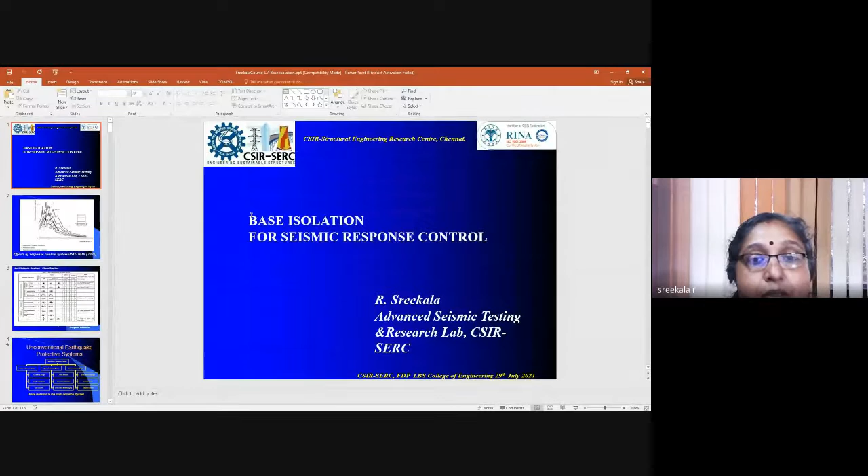After I joined, I was quite fortunate to be involved in some of the works carried out, regarding base isolator testing and the seismic testing of structures. Whatever I'm presenting today is basically some of the works which have been carried out in SERC, and some of the model provisions which are there in this field of base isolation, which is coming up nowadays. The IS 1893 Codal Provisions Part 6 is coming up, and it is under publication. With this introduction, I would like to start the presentation.

I hope you all enjoyed the session in the previous days. Our earlier head of the department, Dr. Satish Kumar, elaborately discussed the topic of seismic response control, and various mathematical principles behind that have already been discussed with you. With that introduction, I hope the seismic response control systems are quite familiar to you.

There are many types of devices or external fittings which can be fitted into a structure, or even for newly constructed structures, these technologies or strategies can be adopted. All these base control systems come under the category of passive control systems. In vibration control there are passive, semi-active, and active control systems, out of which we are right now discussing the passive control systems. Base isolators come under the category of this passive control.

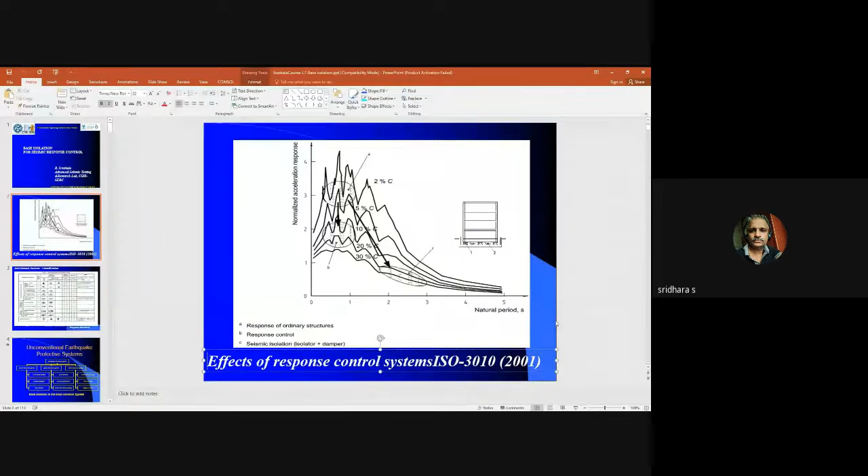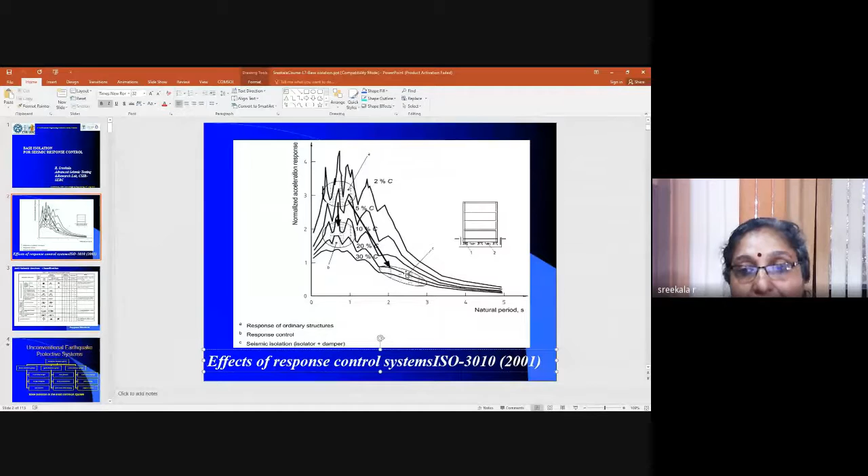I have tried, okay. So this is the response control system description given in the ISO standard 3010. If you see the response of ordinary structures, represented in category A here, and when you adopt seismic isolation, it comes under category C, where isolators and dampers are introduced to reduce the seismic response quantities, in the sense acceleration, drift, or other engineering parameters of interest.

So with seismic isolation, there are many other seismic devices which can be fitted into the structure to reduce seismic parameters like accelerations, displacements, and other parameters. You are all familiar with these kinds of devices, which can come under different categories like passive or semi-active control systems.

The European standards have classified these anti-seismic devices. The representation comes under displacement dependent devices or velocity dependent devices, and there are elastomeric isolators.

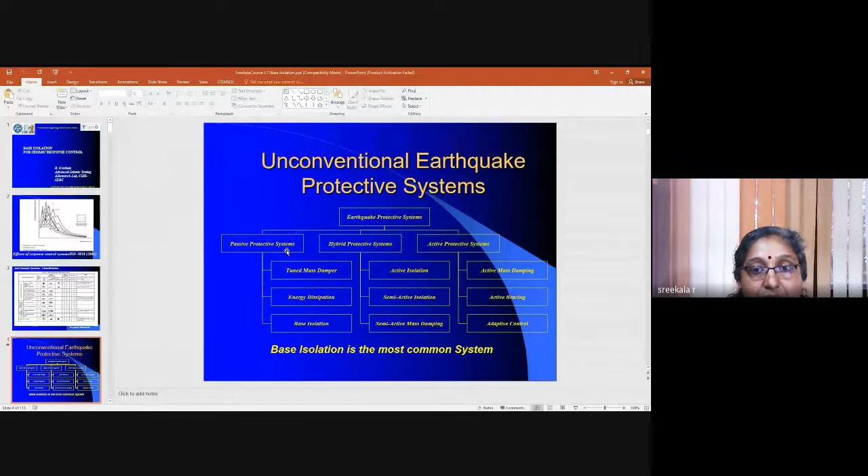So what it actually does, when it acts like a passive protection system, when you have the base isolators within the building, it tries to absorb the energy so that it decouples the superstructure from the substructure. This decoupling process increases the time period of the structure, so that if you see the response spectrum, the force attracted, which is a resultant of that elongation of the time period, gets reduced. That is the actual mechanism which happens in base isolators.

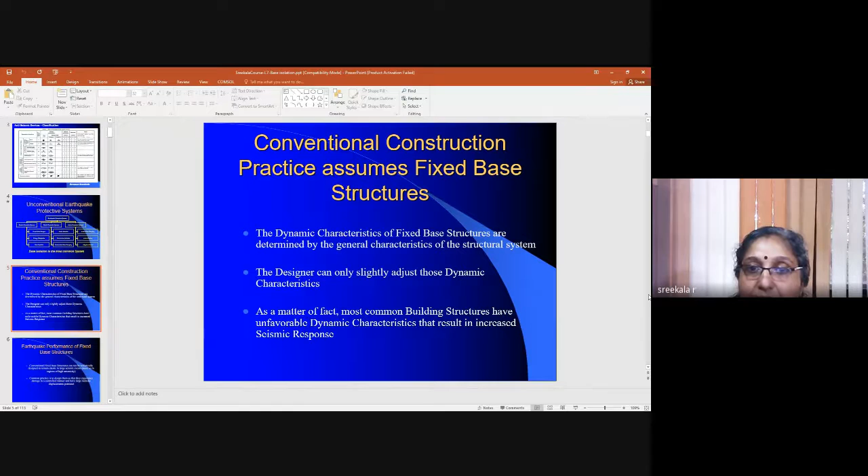So the conventional construction practice assumes fixed base structures. The dynamic characteristics of fixed base structures are determined by the general characteristics of the structural system. So what difference the isolator makes is that technically it changes the time period of the structure, so that the base shear which the structure attracts due to these earthquake forces gets reduced.

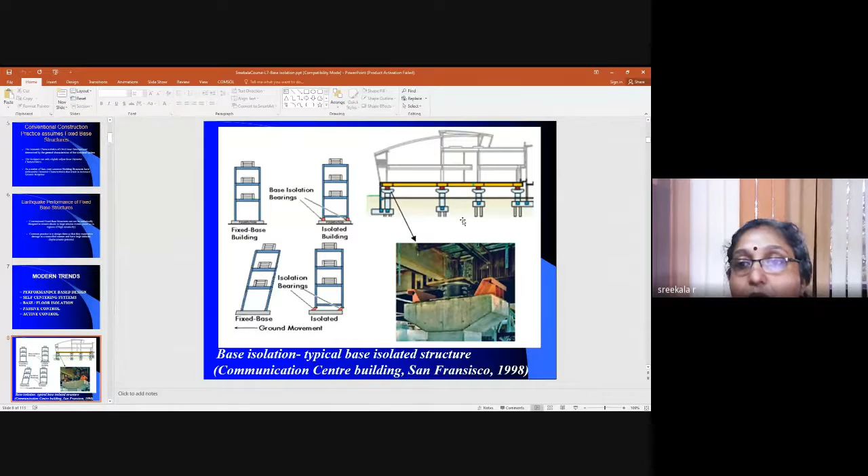This is a communication center building in San Francisco, wherein these kinds of isolators were implemented in 1998.

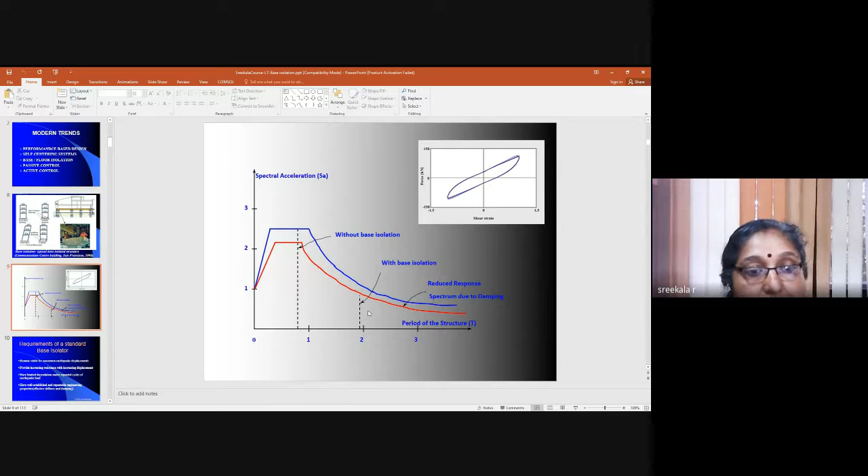So many times the practice of base isolation with higher damping will be mostly beneficial, and a judicious judgment of the base isolation practices has to be done even before going in for the actual implementation.

Large parts of India are prone to moderate or severe earthquake shaking, and there are many critical infrastructures built in these regions, so earthquake resistant design is very much essential. But the choice of base isolation need not be quite helpful in certain parts. If you classify structures in terms of time period or other characteristics, a judicious selection of these practices has to be made before going in for actual implementation.

This is as per the FEMA guidelines, the Federal Emergency Management Agency. Our codal provisions, earlier codal provisions, were taken from the NEHRP and FEMA guidelines.

So if you take the actual seismic response behavior of a structure when you provide this base isolator, the characteristics which need to be clear before we adopt this strategy are the maximum and total maximum displacement of the isolator, which includes not only static displacement but also dynamic displacements of interest, and the hysteretic energy dissipation characteristics of the device.

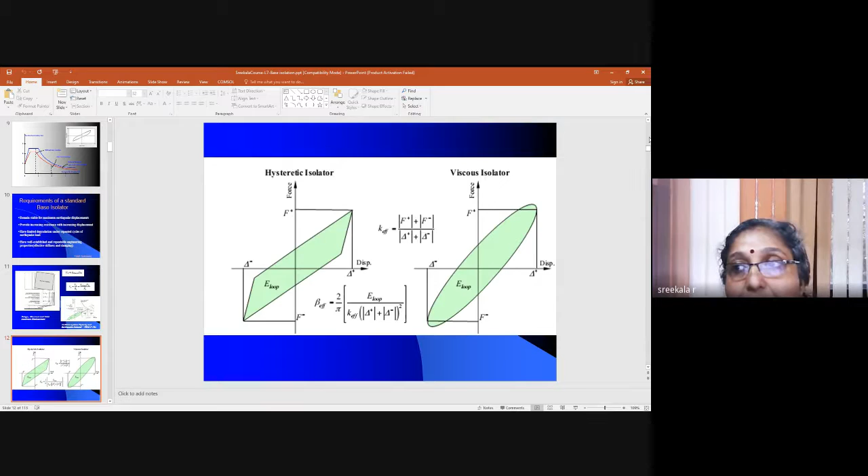When you go in for earthquake resistant design, there are three parameters we are interested in: ductility characteristics, over strength, and energy dissipation characteristics of the system. The energy dissipation characteristics of the isolator are important, and the maximum displacement this isolator suffers during a particular level of earthquake is also important.

Where and how we can provide these base isolators is of particular interest for us. They can be provided at the base of a building, or at intermediate levels. There are floor isolation techniques in which these isolators are provided at intermediate levels of the building.

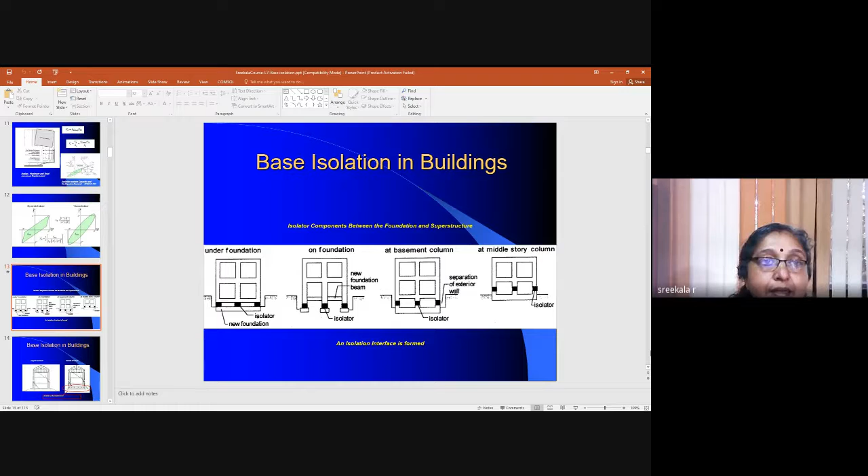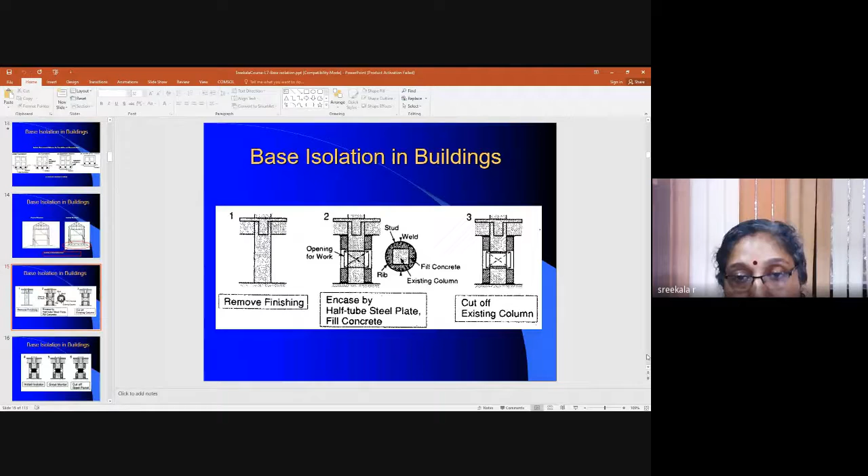So basically the whole presentation is made in such a way that after this brief introduction of isolation in buildings, where the isolators are placed at the foundation level and how they are placed, the construction practices are briefly described here, how they do it even for existing buildings, not only for newly designed buildings, but it can also be practiced for existing buildings.

The same strategy can be practiced even at intermediate levels, or even roof isolation systems, which are actually implemented in many places.

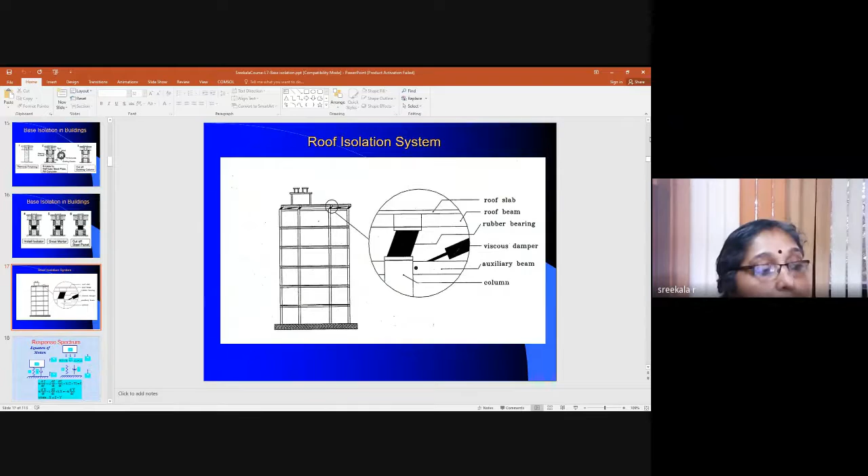So the basic presentation is divided into 4 or 5 categories, after which we have seen what are the basic requirements of a base isolator, and some of the basic concepts in which this isolation system works.

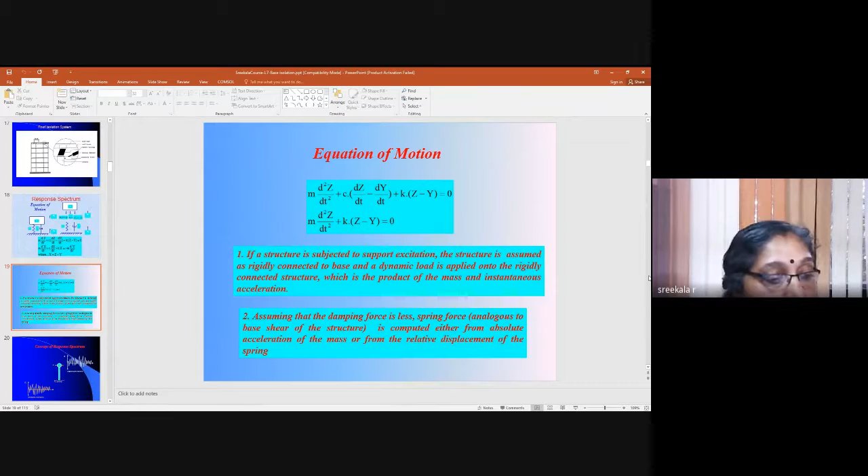I think you are all familiar with basic concepts like response spectrum, and how an idealized lumped mass system, when acted upon by inertial forces, the response will be calculated. An idealized system is represented through its stiffness, damping, and other characteristics, and how the modal damping or other characteristics of the building influence the response of the structure.

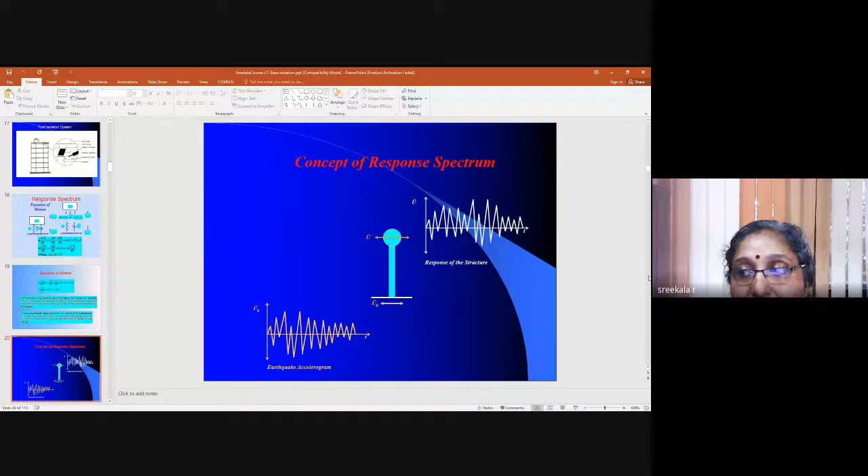Response spectrum is a representation of the seismic response of an idealized single degree of freedom system. But it is a smooth response spectrum that we use for an ensemble of earthquakes, since accelerograms of various earthquakes can be of different types - long duration or short duration events, near fault or subduction events, or normal earthquakes. So response spectrum provides the designers the seismic force which can be imparted on a structure for a particular level of intensity of earthquake.

The intensity, or the whole lot of structures, are classified in terms of the time period of the structure, and the y-axis represents SA by g, or the spectral acceleration. Depending on the time period of the structure, the classification of structures comes under that. So the representation of the natural time period of the structure is what determines how much seismic force will be imparted on a structure.

So from the designer's perspective, it will be easier for us to make use of the response spectrum and find out the seismic forces, and for those forces we can design the structure, so that earthquake resistant design of structures has been made.

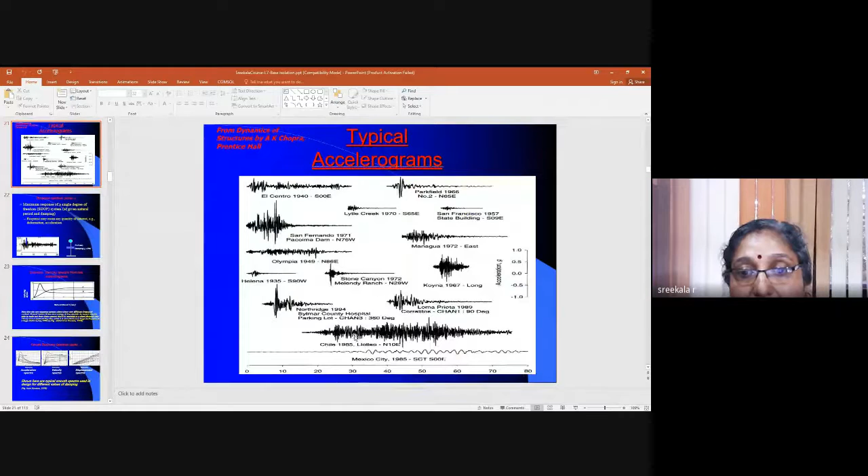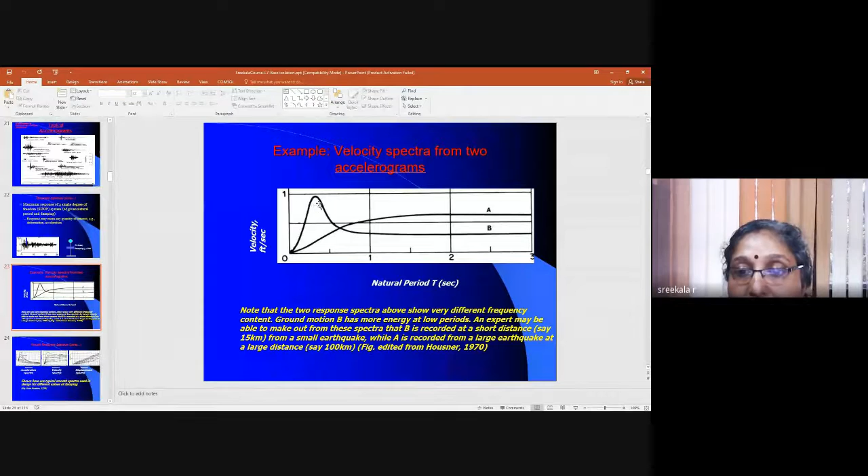Here A and B character - A is for a particular kind of earthquake, and this is for another kind wherein you can see a higher velocity response is observed. So these are two types of earthquake which can be represented in terms of energy characteristics, and the energy imparted to the structure will be different for these two types.

So every earthquake is unique in nature, but for the designer's point of view, in order to simplify the process of design of structures, we make use of this response spectrum.

But we all know there are other kinds of effects which come into picture, like the soil effect. When you see soft medium clay and sand - this is a typical example taken from the textbook - you can see there are variations in the spectral acceleration with respect to the time period. If you see the ratio between spectral acceleration and maximum ground acceleration, there are variations.

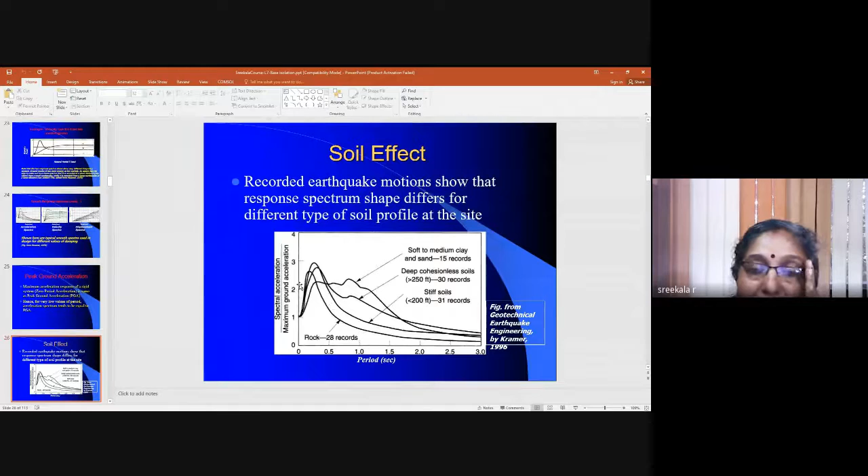So the concept of response spectrum is very much dependent on other factors. It is the one which tells you how much force, or the horizontal force, will be imparted due to a particular level of earthquake.

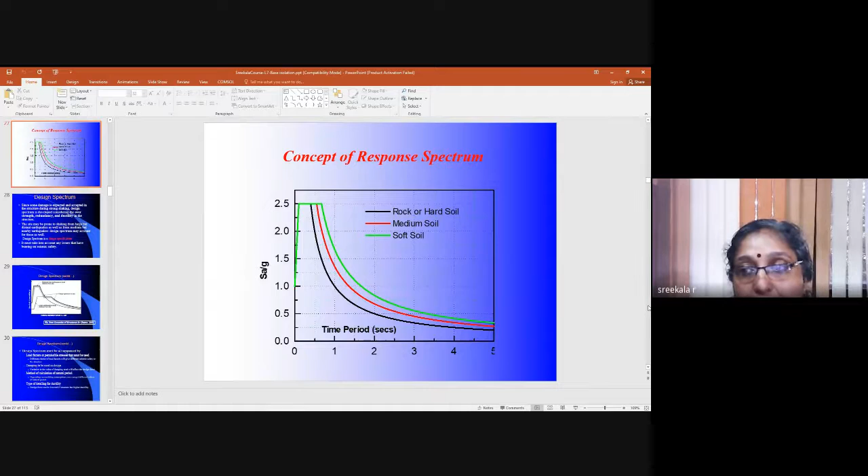And we all know there are different zonal classifications. The whole of India is classified from zone 2 to zone 5, and there are different acceleration levels or PGA levels associated with those zones.

I would like to skip these slides because you all will be much familiar with this kind of representation. But of course, we'll be knowing that there are differences.

There are differences between different kinds of earthquake accelerations, accelerograms, mainly due to the energy imparted to the structure. Here you can see this is a moderate size earthquake at small distance from the site, but a large earthquake at large distance from the site can be represented through this. So the area below this may represent the energy imparted to the structure.

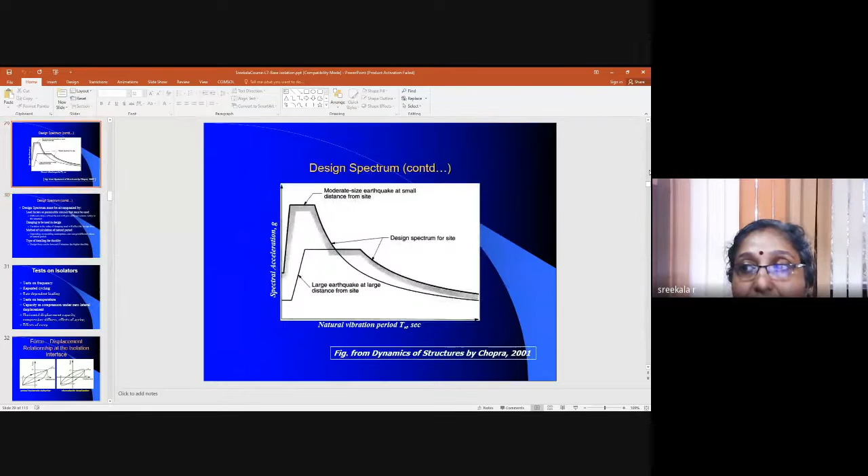But there are significant observations which can be learned from these kinds of response spectrum as well.

Today we'll concentrate on the seismic design of structures with isolators. As we talk about isolators, which are provided below the superstructure, they have to be tested for various dynamic characteristics. What are these characteristics? There should be tests on frequency, repeated cycling, rate dependent loading, temperature, maximum horizontal displacement, compression stiffness, and the effects of aging and creep. These are the main dynamic characteristics which need to be tested.

There are different standards which talk about this. There are international standards 22762, which have various parts. Parts 1 to 4 talk about different kinds of testing meant for isolators for various applications - for buildings, for bridges, and so many other things.

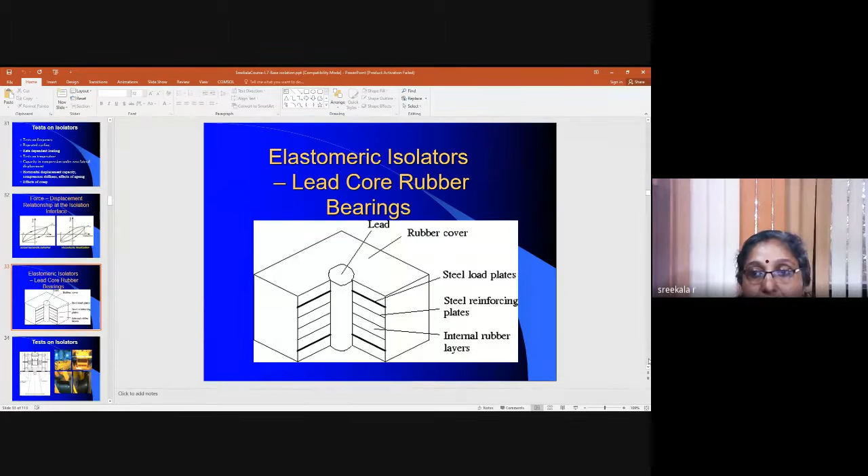This is a kind of test setup developed here earlier. Our earlier director Dr. N. Lakshmanan, our previous head of department Dr. K. Muthumani, Dr. Gopalakrishnan, and Satish Kumar were all involved in developing this testing setup within the laboratory. You can see the isolators here.

There are two isolators kept here. Normally, isolators placed between the superstructure and substructure are subjected to a constant vertical load, and either linear or non-linear varying seismic demands or lateral loading. So a test setup should provide this kind of loading. You can see the varying load given, with a pre-tension device setup so the axial load can be fixed for a particular loading case, or it can even be varied.

You can see the isolators subjected to lateral loading and constant or varying axial loading. This is a typical force displacement hysteretic curve obtained on the prototype laminated rubber bearing, designed and developed by SERC, made by people familiar with rubber processing and the chemical or heat treatment processes involved, by which steel plates are fully vulcanized with rubber layers.

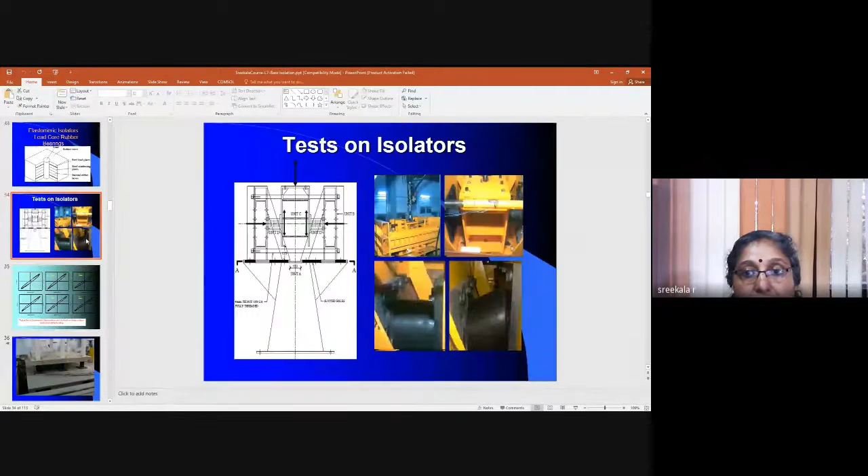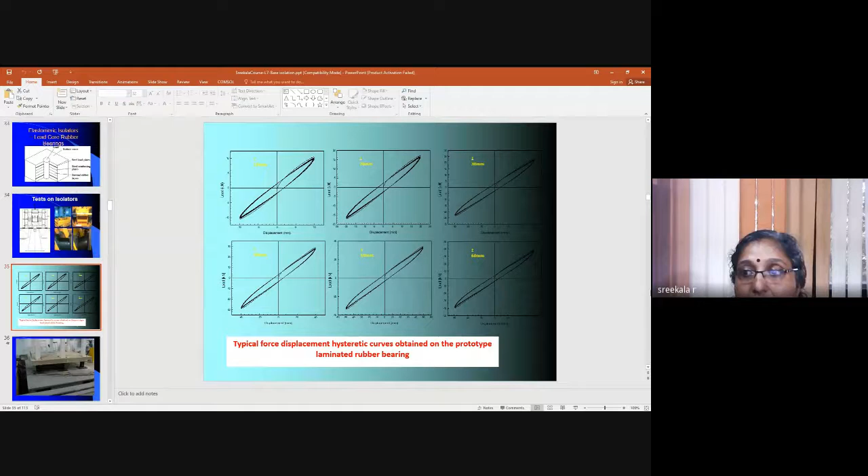After the test, you arrive at the force displacement characteristics of the isolator, shown here for varying types of loading. This is a kind of cyclic test, but it's quasi-static testing. There is shake table testing performed on these types of isolators. This product was developed at SERC, with component level testing as well as prototype testing carried out on structures.

The product consists of steel shims which prevent the rubber from bulging out and increase vertical stiffness. The lead core is introduced at the center, which yields at very small levels of lateral displacement, increasing the damping characteristics of the system. If you see the response spectrum pseudo-acceleration characteristics, with the introduction of period shift in the structure, the seismic response has improved - acceleration has been reduced and damping characteristics increased.

Seismic base isolation is an effective method for filtering out high frequency components in an earthquake. The characteristics of input ground motion are quantified by the response spectral acceleration, which normally diminishes at low frequencies or high time periods, typical of base isolated structures. Here you can see the behavior of the system plotted against displacement and time period - as damping increases, the seismic response also reduces.

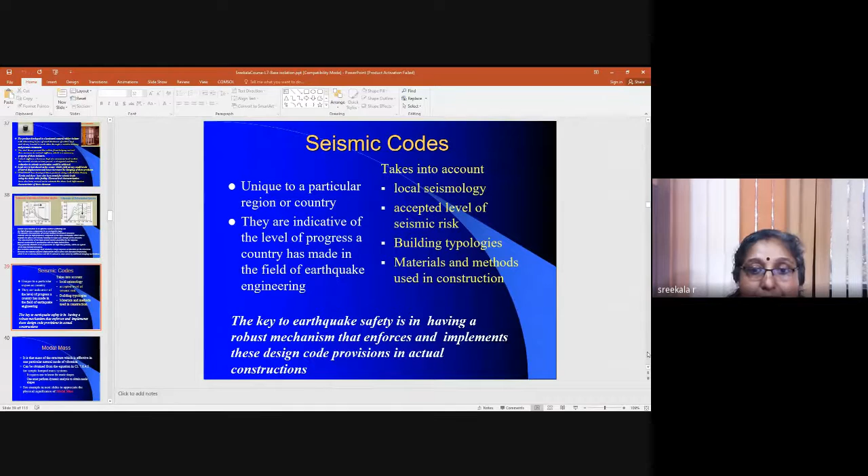So they are prescriptive in nature. Seismic codes help designers bring out safe construction practices. Earthquake safety lies in the proper usage of the code provisions, and there should be a robust mechanism which enforces and implements these design code provisions in actual construction.

So these are some slides which I would like to skip, but these are some terms which we should be familiar with - the modal mass, the mass of the structure which is effective in one particular natural mode of vibration.

When we take this response spectrum into consideration, it has been developed for an idealized single degree of freedom system. Many civil engineering structures mainly belong to the acceleration-sensitive or velocity-sensitive region of the spectrum.

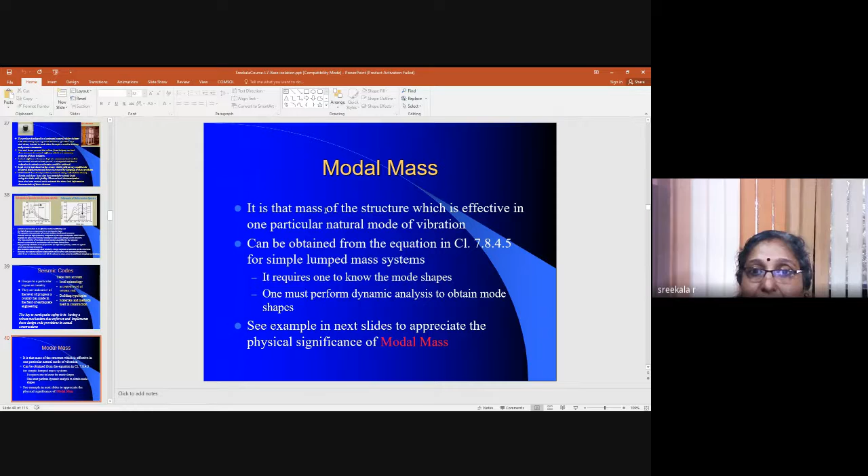We'll be much more interested, as civil engineering structures, in the natural frequency or time period associated with the initial few modes. But when we talk about tall buildings and other things, in the long period region of the spectrum, higher modes also will be of importance. So modal mass is something which is associated with the natural mode of vibration.

For example, these are some things taken from the course provided by IIT Kanpur, by Dr. Sudhir K. Jain, professor, who has given a wide explanation of different kinds of terms associated with that. If you take the example of modal mass, in this 3 degree of freedom system, 5% damping is assumed in all the modes.

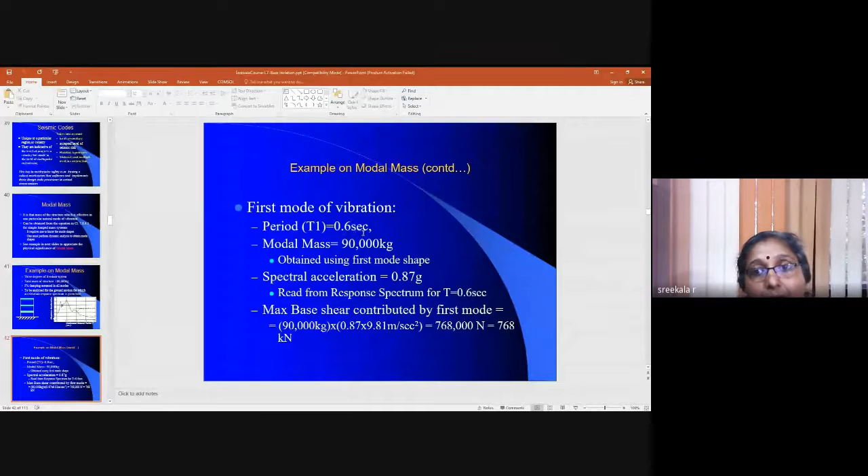So the base shear associated with that has been compared with the other modes. All these examples are there in the notes or other documents which have already been published by IIT Kanpur - you can have a look at that.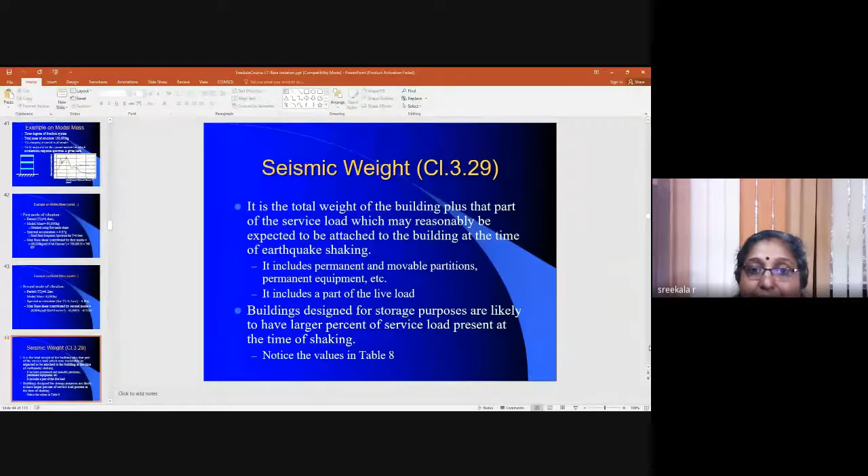And effective seismic weight is something which often comes up in the new codal provisions also - the seismic weight which we take into account due to the dead load, the service load, and the live load. In the recent codal provisions, instead of 25% live load, we are supposed to consider 50% live load.

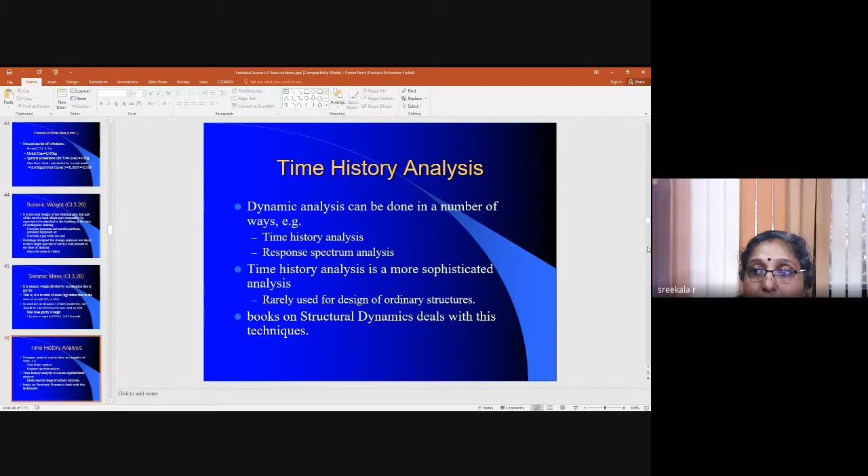When you talk about the analysis, there are different kinds of analysis. The earlier codal provisions were using equivalent lateral force procedures, depending on whether the structures are regular or irregular. Equivalent lateral force procedures also have certain limitations, so probably we may have to go into other kinds of analysis - response spectrum analysis or time history analysis.

Time history analysis, of course, is computationally intensive. It requires a lot of other inputs as well. It is not quite as easy as the equivalent lateral force procedure, but where and when we should use these kinds of analysis is very much clear in the latest codal provisions, IS 1893-2016. Probably you can have a look at that.

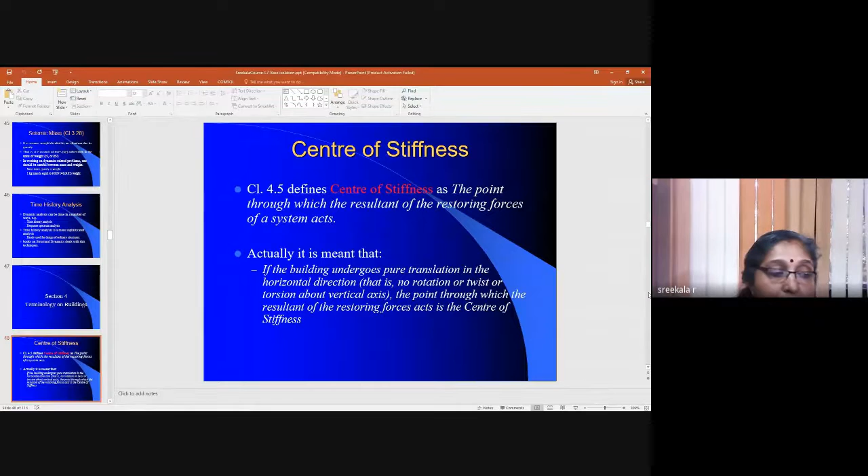There are terms like center of rigidity and center of stiffness, static eccentricity and dynamic eccentricity, and accidental eccentricity, for which allocation has also been provided. There are dual systems which we need to consider.

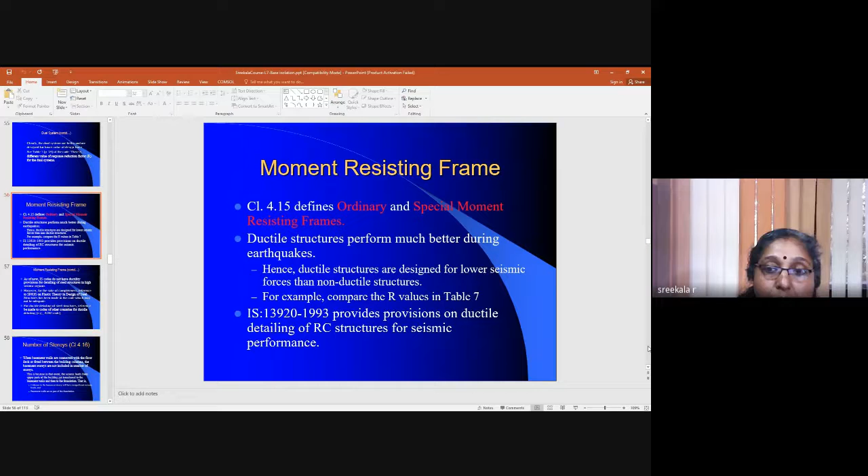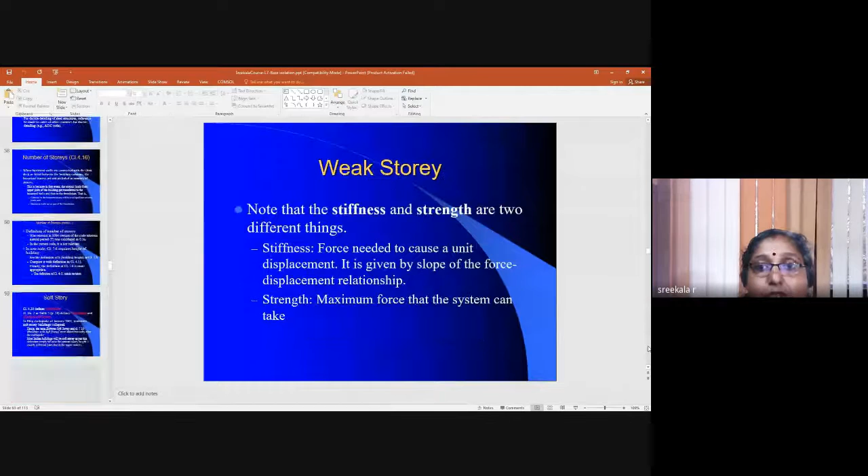Then there are moment resisting frames of different categories. IS 13920 provisions are getting upgraded for RC, and a new steel building code is also coming up, maybe published in a few months. Terms like soft story and weak story should be familiar before we move to actual practices.

Then there are story drift limitations. Basically, all these are meant for having a seismically safe construction practice.

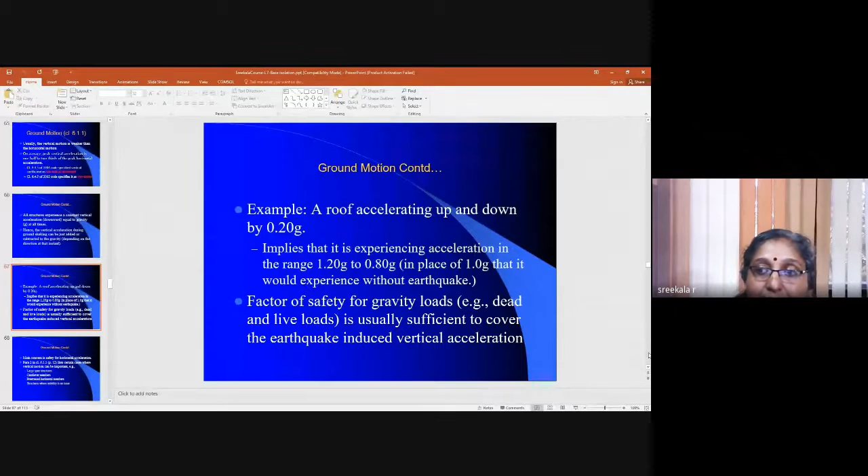When we talk about design of isolators, it is not only the horizontal component but the vertical component that also has importance. Normally vertical component is not considered in many engineering practices, but since the structure itself has weight, around 1g acceleration level is already accounted for due to the weight of the structure.

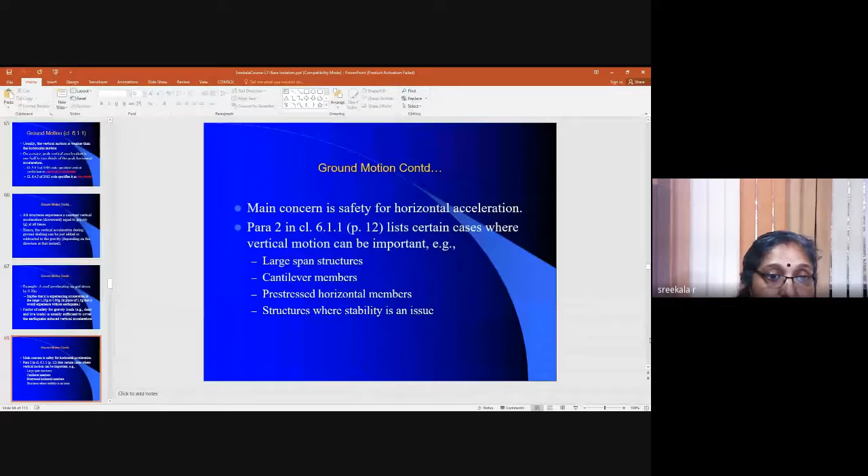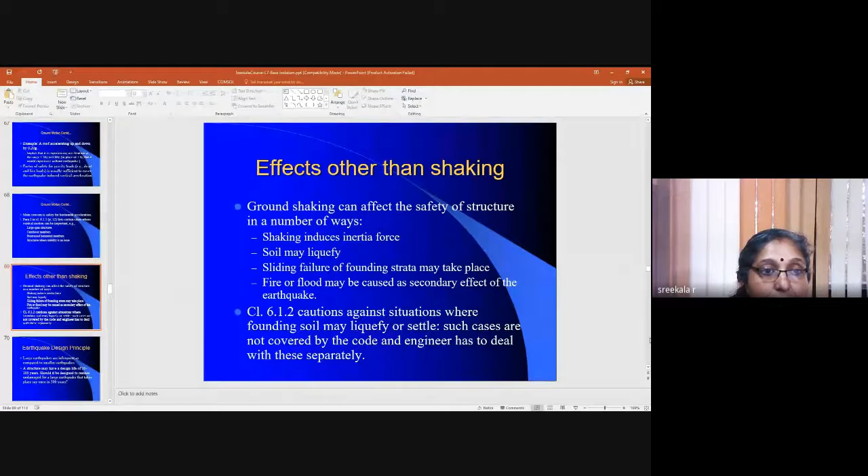But if the structure is subjected to acceleration above this, maybe around 1.2g, an additional 0.2g may be considered, or a reduction. A particular level or different kind of earthquake requires a different perspective in dynamic characterization of the building. Nowadays the codal provisions also take into account vertical acceleration effects, so base isolators need to be characterized for these vertical acceleration effects too.

Now, you will be familiar with the concept of response reduction factor. It is an empirical factor, but its genesis relates to the ductility characteristics or redundancy characteristics of the structure, or can be associated with the overstrength of the structure.

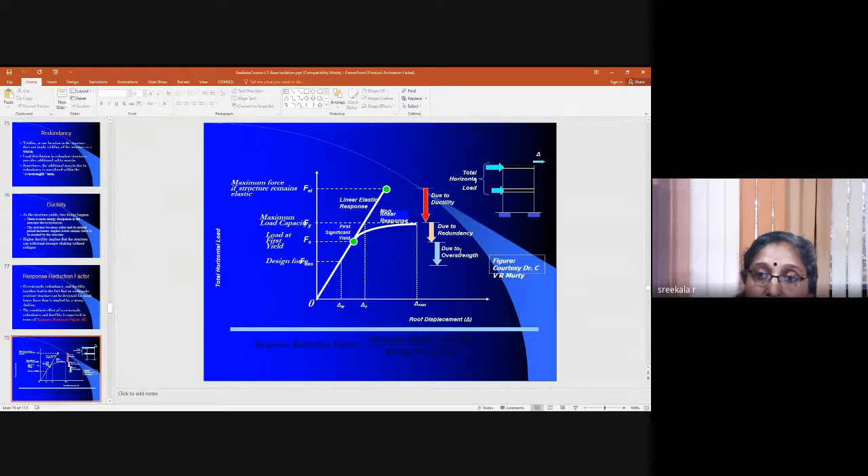So response reduction factor is one thing wherein you try to associate different material or system characteristics so that the seismic response of the system is represented by that empirical factor R, the response reduction factor.

Moving to IS 1893 part 6, this standard covers requirements of a base isolated building. Its codal provisions are meant for monolithic RC buildings and conventional steel frame buildings, not for buildings with flat slabs or precast structural elements. The provisions apply to base isolated buildings, and when the site period of the structure is around 0.8 seconds or more, base isolated buildings shall not be built as per this code.

Normally the whole of India has been classified into various zones with known zone factors. But for constructions of higher importance, a site-specific analysis is needed, especially where the site period is more than 0.8 seconds, belonging to a long period category. Such base isolated buildings are not recommended as far as the standard is concerned; we may have to go to specialized literature on that aspect.

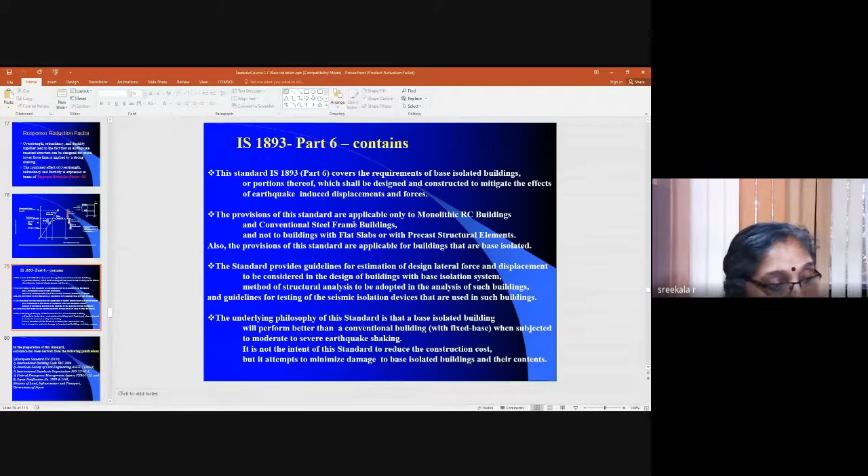These are important points to keep in mind since the code applies only to monolithic RC buildings and conventional steel frame buildings. Though base isolation practices have been made at various levels, our upcoming part 6 code talks about isolators kept at the base of the building, above the foundation or below the superstructure. The base level is defined as the level of the building above the base isolation system.

The isolation system is normally horizontally flexible and vertically stiff. It is designed to permit a specified value of lateral displacement at the base of the building during an earthquake, and it has to dissipate energy under cyclic loading.

The code attempts to minimize damage to base isolated buildings and their contents; it is not meant for reducing cost. So keep in mind that while going for a base isolated building may definitely increase the cost, the purpose of base isolation is not meant for reducing the cost of the building.

It is to reduce the seismic response of the building, especially in the region of the spectrum which is energy sensitive, acceleration sensitive, or velocity sensitive. When you impart base isolators to the building, the time period of the building changes, and when it goes beyond a certain category, they are not advocated at this point of time.

As far as the codal provisions are concerned, you may have to go in for specialized literature for that purpose. The standard provides guidelines for estimation of lateral force and displacement to be considered in the design of buildings with base isolators.

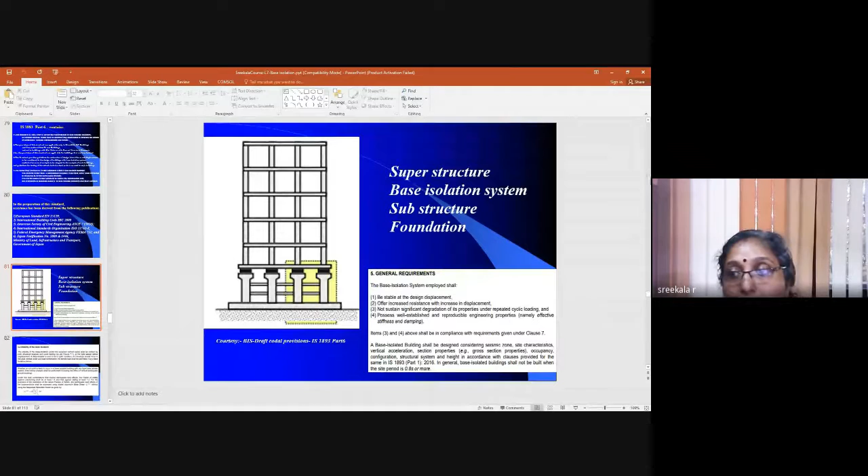As far as the stability of base isolators is concerned, the base shear without using the response reduction factor has been considered, wherein the earthquake load effects are involved. Factor of safety against overturning shall be a minimum of 1.4, and against sliding it should be 1.2.

For the purpose of estimation of the factor of safety, the earthquake load effects in the superstructure shall be estimated using elastic maximum base shear - that is, without using the response reduction factor, which is equivalent to 1. So it is equal to the zonal factor multiplied by I into SA by G at the effective time period.

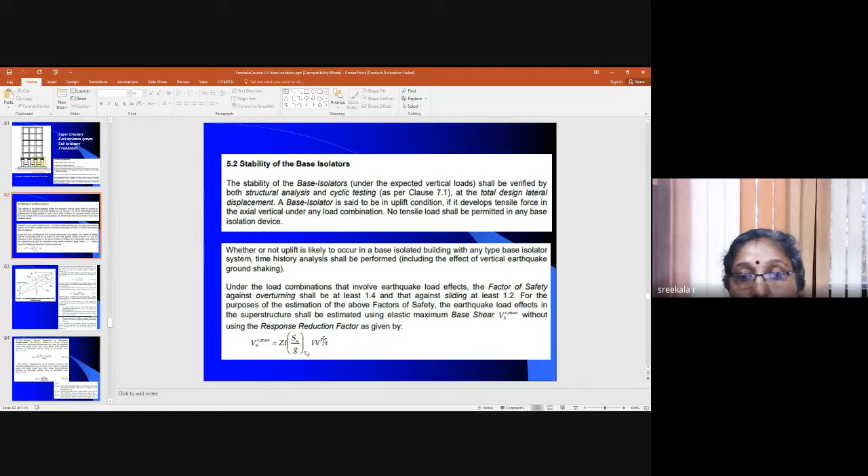We'll see what are the effective time periods and the effective seismic weight. This effective seismic weight is related to the seismic weight considering the dead load and service load, the live load - 50% of the live load - and all other imposed loads on the structure.

This is the provision given in ASCE 7 2016, and the same has been adopted in our code provision also, because it belongs to the testing requirements of the isolator. So what comes out from this is the dynamic characteristics of the isolator, wherein you are able to find out the maximum displacement and the energy dissipation characteristics. From that you can derive the effective stiffness and effective damping of the system, because they are very important as far as the seismic response of the structure is considered.

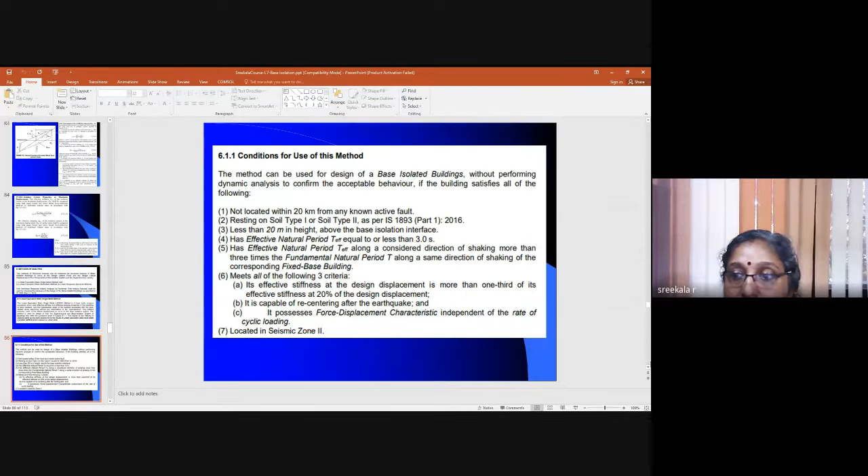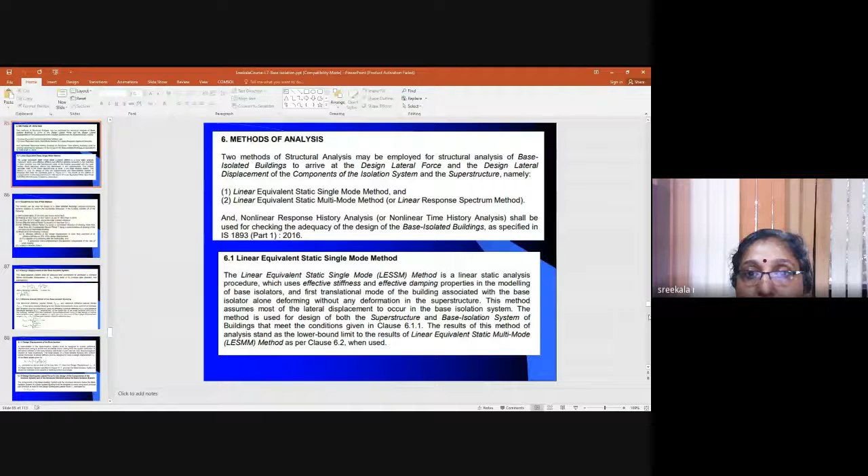Then when we go for this linear equivalent static multi-mode method, we need to follow the other clauses which will be described further.

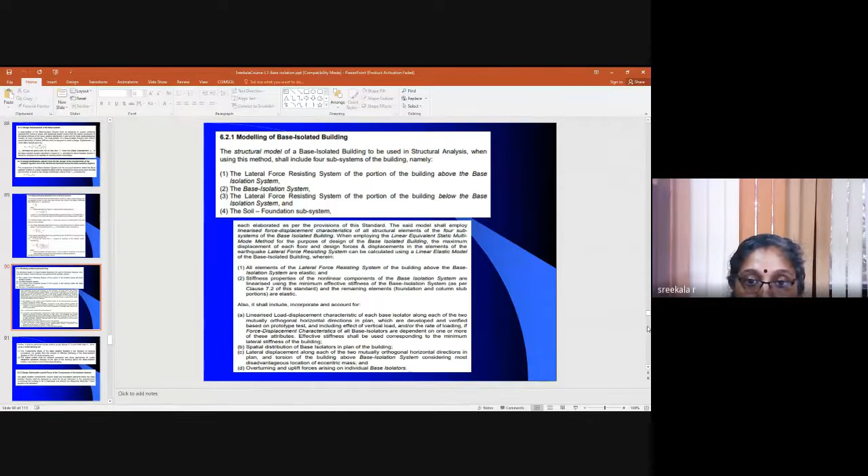The fundamental mode of a base isolated building in the direction of shaking is not greater than the smaller of the effective damping of the base isolation system, or 25% of critical damping, as specified in the code. The same specification can also be seen in ASCE 7-2016. The higher mode shall be selected consistent with those appropriate for linear response spectrum analysis of the part of the building above the base isolation system, assuming it to be a fixed base building.

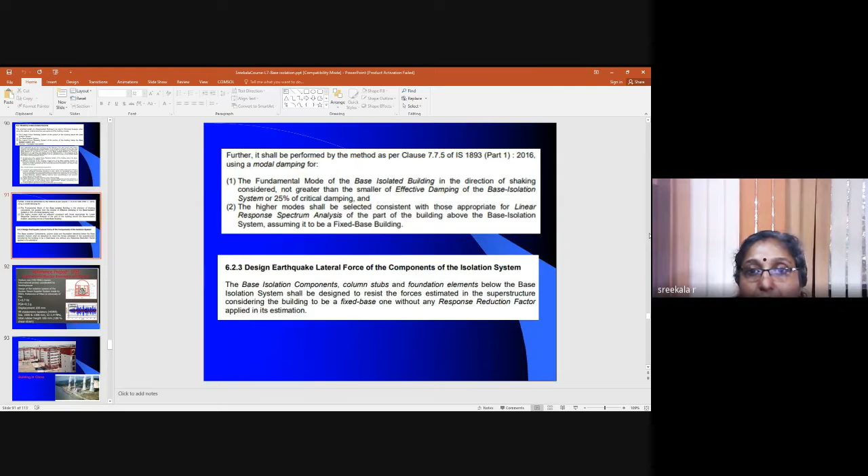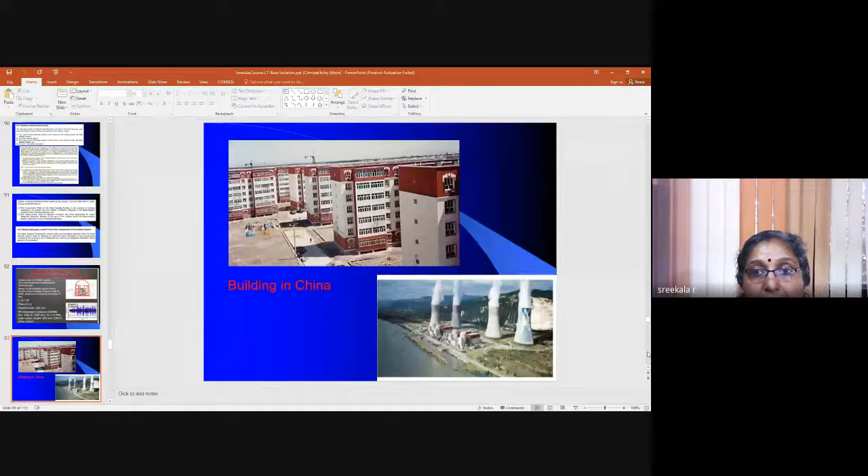This is a kind of isolator which has been practiced in other countries, even long back, for nuclear power plants. There are buildings provided with isolators in China, and other industrial structures where isolation systems are being implemented. In India, after the Bhuj earthquake, the Bhuj hospital building has been constructed on isolators imported from countries like New Zealand. The hospital building in Bhuj is resting on those isolators.

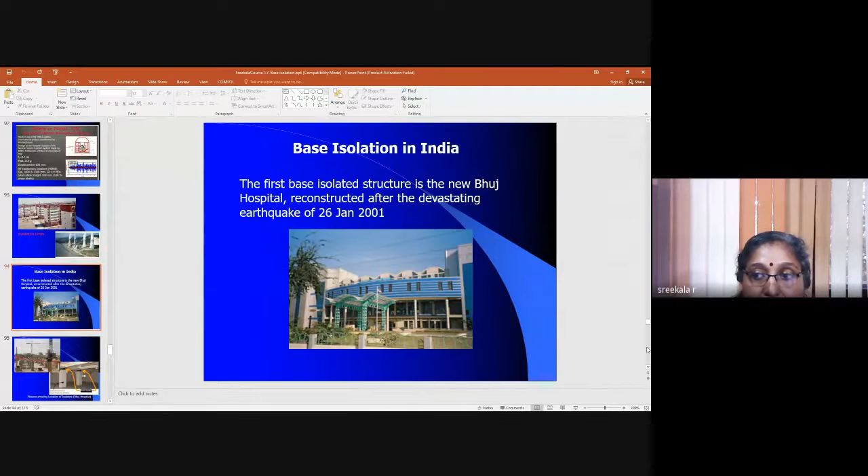We have the technology of making isolators indigenously, making rubber isolators, so that with a reduced cost probably we can go for this technique. It is a widely accepted technique, and as the model provisions come up, it will definitely have a lot of scope for construction of our buildings.

If we provide these isolators on basement columns, the place will be accessible for repair. Maybe after a few earthquakes, if some isolators go off—because it's a sharing system, there are many isolators to take up the load—you can access this area and replace those isolators without much difficulty.

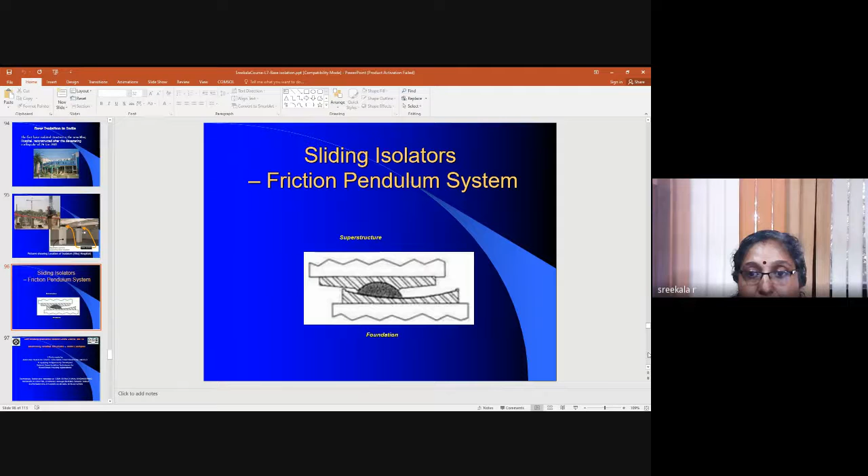Till now, what we were talking about is base isolators made with elastomer components. There are other isolation systems like friction pendulum systems, which work on yielding of metals or friction between two metal plates, and there will be a rolling system here. There are other kinds of systems which have been practiced long back.

Our laboratory has witnessed these kinds of testing, where the whole building was resting on rollers. There are restraints provided on either side, on the whole periphery of the building. You can see they are all concrete balls, very tough concrete balls, so that they should not get crushed during a higher intensity earthquake.

These rollers were designed for the purpose of providing a rolling kind of system so that it decouples the superstructure and the substructure. This was tested long back in our laboratory in the uniaxial shake table test facility.

So these are all isolation systems. It is not only the elastomeric isolator system, but the systems prevalent throughout the globe include base isolation systems made with rubber isolators, and other kinds of isolators like friction pendulum systems and others which are coming up.

The Codal Practice IS 1893 Part 6 talks about isolation systems, but not all kinds of isolation systems. It is generally restricted to a particular kind of isolation system where the isolator properties are characterized in terms of its stiffness, effective stiffness, and effective damping characteristics.

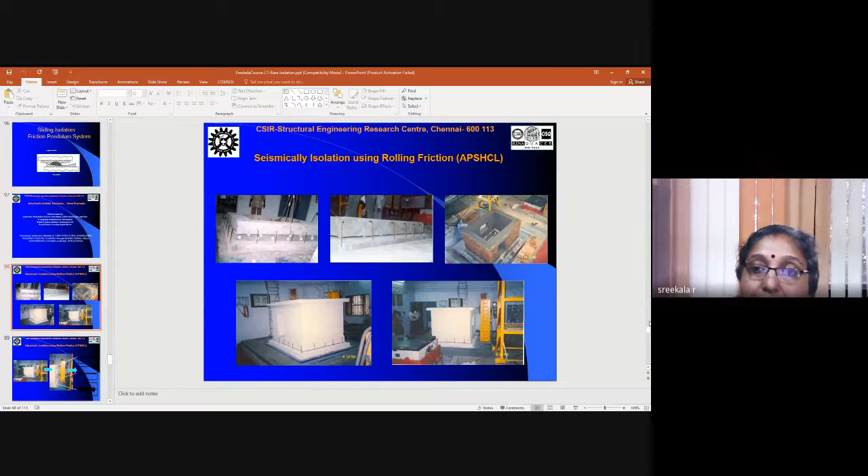So these are some of the test results and test setup which we have used earlier. Of course, you have seen those results and the setup yesterday—the video was shown by Satish sir regarding the testing of these isolators, or the testing of structures with isolators.

So there will be a reduction in story drift, or a reduction in other engineering parameters like acceleration levels. There will also be changes in the natural frequency or the time period of the structure, which reduces the seismic responses.

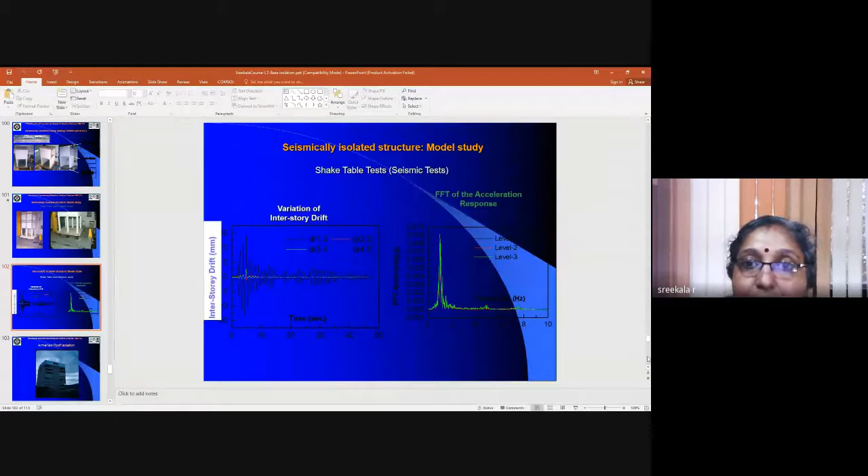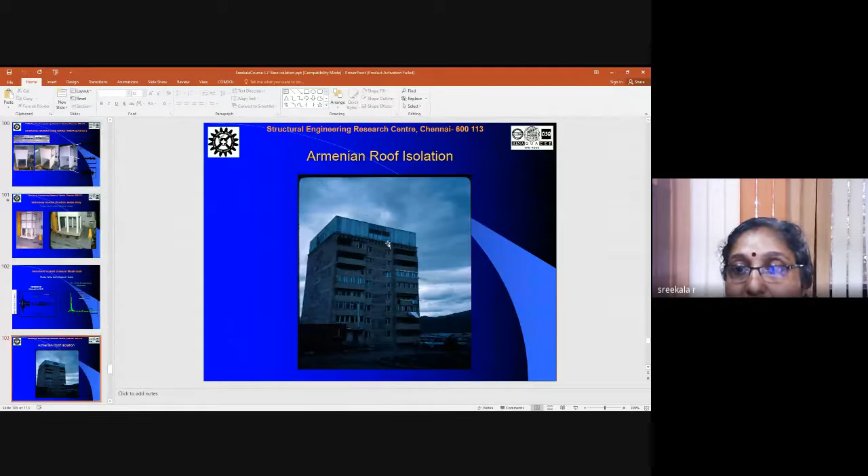There are also roof isolation practices. This is one such building where roof isolation practice is being used, in Armenia.

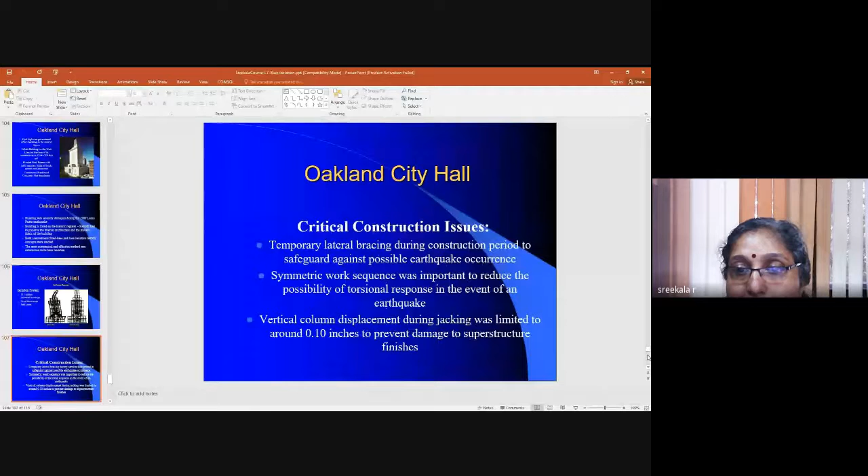Similarly, the San Francisco City Hall, which was built in 1915, has also been retrofitted with isolators. After the Loma Prieta earthquake, this building suffered a lot of damages, and it has been retrofitted with isolators. As far as this building is concerned, there were various options available to retrofit the structure.

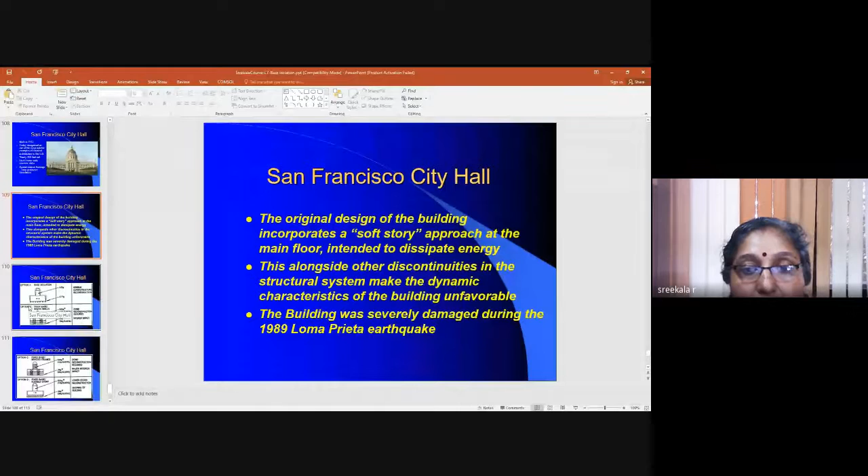So when you construct a building, it is not only the building frame. When you design the building frame, of course, you have to design it in such a way that it should be safe against earthquakes. It should have a well planned earthquake resisting system. But at the same time, the contents within the structure also matter a lot for specific buildings.

That is why research in the area of non-structural components is of importance. They are of importance in case of industrial buildings, and very important in the sense of hospital buildings and other kinds of buildings, wherein non-structural components play a major role.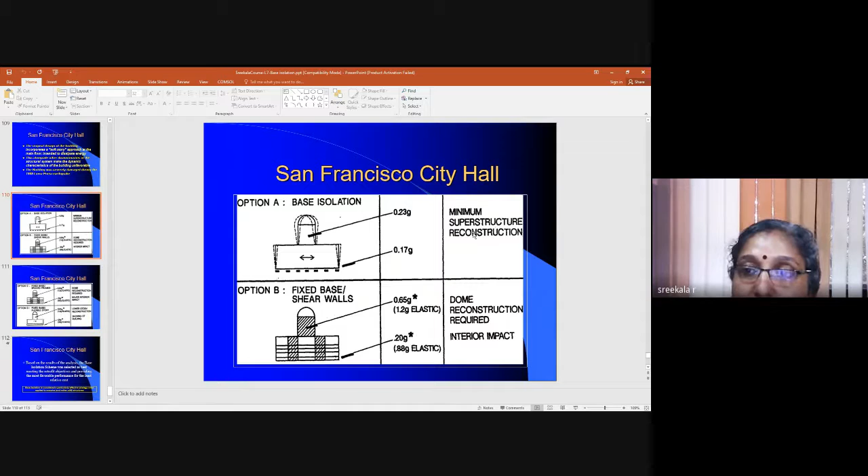So out of all the options, the one which follows the base isolation is considered to be more suitable, mainly because the acceleration levels at the base are getting reduced a lot. You can see that 0.23 g is the acceleration level above this. And it requires minimum superstructure reconstruction because the acceleration levels are less.

So based on the results of the analysis, the base isolation scheme was selected as the best for the retrofit objectives. And it is one of the best chosen strategies for seismic response control.

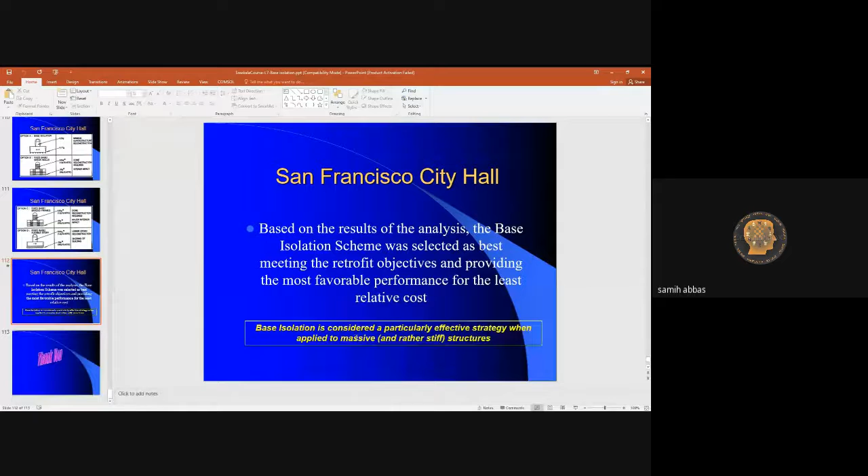Yeah, we have to see the correlation. If you go here, you see it of course changes the time period of the structure. So when you have an elongated time period, if you see the response spectrum, when you adopt base isolation for a particular building which belongs to this region of the spectrum, your time period of the building changes. So as the time period changes, what will be the SA by G value you consider for that building time period? It will be much lesser. So definitely when you implement this base isolation scheme for a structure, your superstructure can be designed for a lesser force. Is it clear to you?

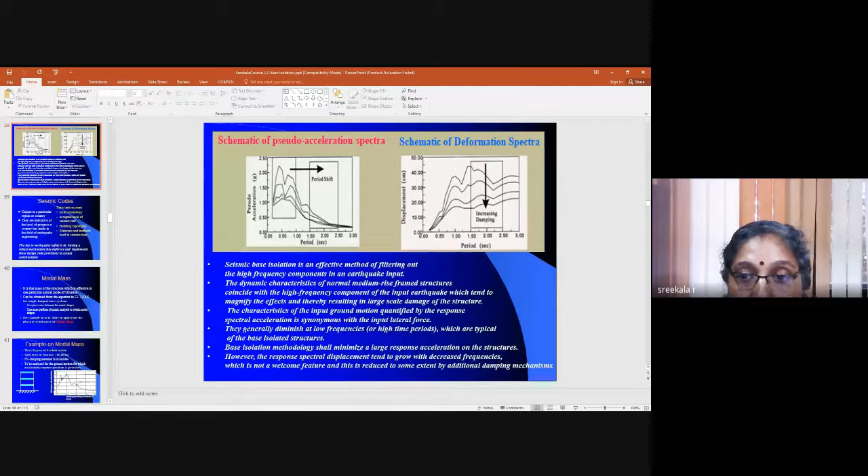It happened maybe after the earthquake. This is one such strategy which they found quite efficient to reduce the seismic load on the whole building superstructure. So the isolators are placed at various locations around the building, and these isolators were important because as such in India, standardized forms of isolators are not available. Though research is progressing in that field, standardization, quality, and quantification all matter. So isolators as such are not available in India. At that point of time, isolators were imported from New Zealand, and they made use of those isolators in the hospital building.

So maybe probably they are functioning well. Maybe a test for such a thing is probably how we cannot test the actual structure. The actual test is probably another earthquake that may tell us how its performance was. Maybe it will not be affected by another significant intensity earthquake.

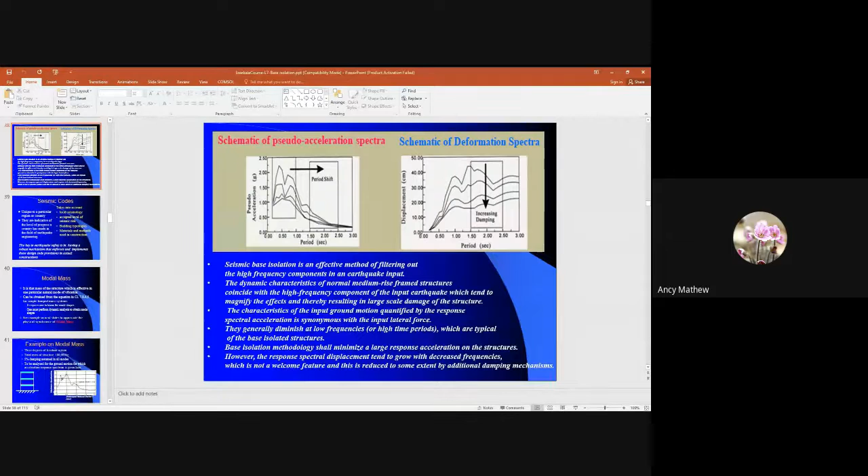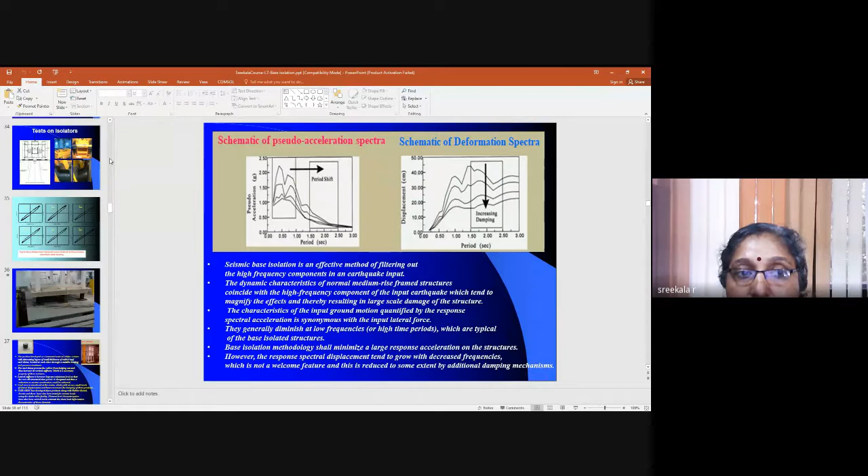I need to do for manufacturing a base isolator? Regarding manufacturing of isolators, these are the tests for isolators. Am I audible? Yes, ma'am, you're audible. Okay, there are various tests which can be performed on isolators.

They are basically tests on frequency, because earthquake excitation is a cyclic phenomenon in which positive and negative cycles will be there, and most earthquakes belong to a certain category of frequency ranges. Even if we consider a broadband, there should be a test on frequency minimum up to maybe 0.25 to 3 hertz. So that is the test on frequency.

There should be repeated cycling. It may undergo different various cycles of motion - an earthquake of long duration, significant duration, has to undergo a minimum of 20 to 60 cycles or maximum up to 200 cycles. So repeated cycling test is another requirement.

Then rate dependent loading - this is one in which, suppose, if the earthquake energy imparted to the structure is so huge, in the case of a near fault earthquake or a very high velocity earthquake, then rate dependence also comes into picture.

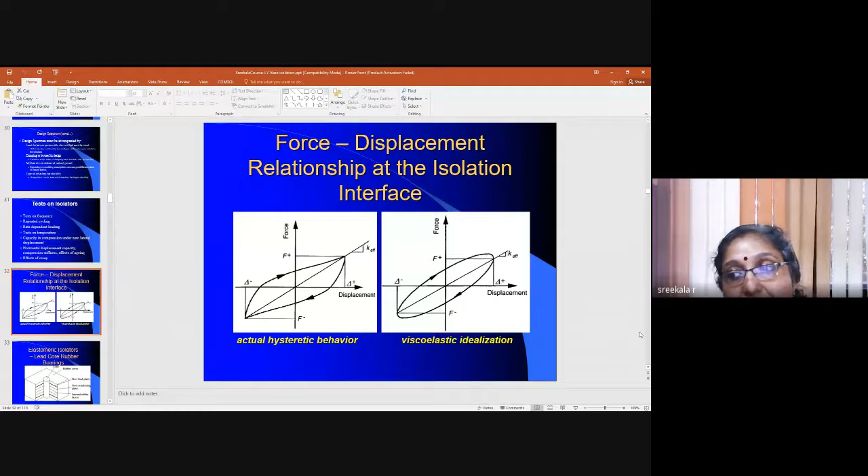The hysteretic energy dissipation characteristics is one thing which, from a structural engineer's viewpoint, is of much importance. The other parameters are highly significant from the manufacturer's point of view, because it should be stable and have good service life and repeated energy absorption characteristics. This also has relevance to the damping of the system and its effective stiffness. So these are the tests which are required for isolators.

Okay ma'am, I have one more question. Right now, how do we design a base isolator for a building? How do we design base isolator for a building? Yeah.

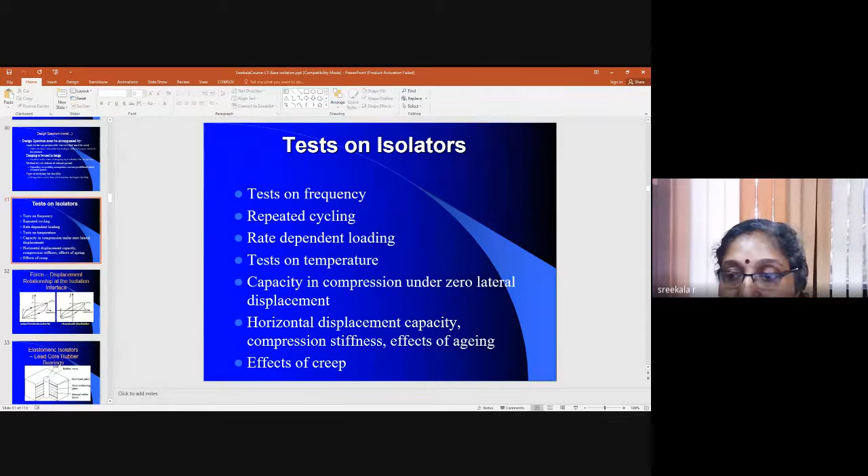We need to find out the effective time period of the structure, for example, which structure you are going to have this base isolation for. Because in the response spectrum, you need to identify where the structure belongs. That should be the first step you should do - like whether you are going to have a base isolator for a building.

If you see our Indian spectrum as per IS 1893 part 1, the response spectrum now has the time period increased from 4 to 6 seconds. Earlier it was up to 4 seconds.

So beyond, if you see the code provisions, beyond 0.8 second when the site period - or site period meaning the time period belonging to the area or at the soil level - it has a time period. But as far as the structure is concerned, where in the spectrum it belongs to is of higher importance. So you need to identify where you are going to have the structure.

Then after finding out the time period, you can follow the procedures given here to find the effective time period, which is dependent upon the zone factor and the importance factor. Here you can consider R equal to 1, which is the elastic time period. Then follow the instructions given here for the effective natural period of the base isolated building.

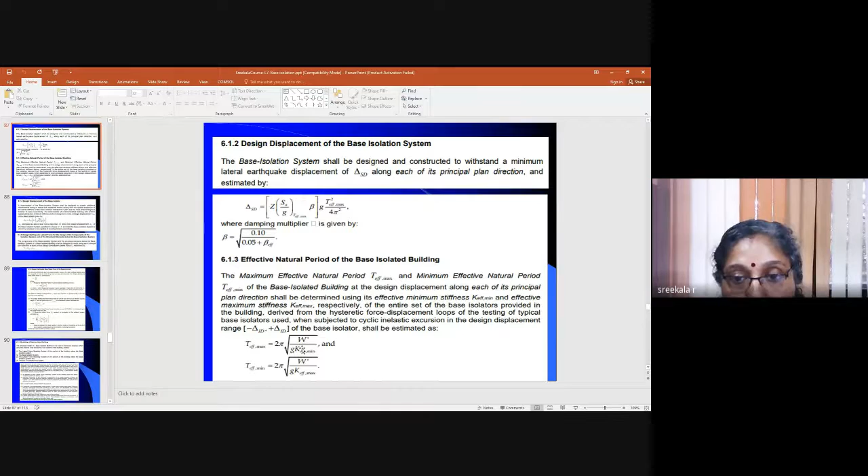So as far as the isolator characteristics are concerned, T effective is the one which you are finding out. Damping and K effective, the isolator characteristics will provide you. But SA by G you can get from the response spectrum, and the zone factor you can also find out where the structure is going to be.

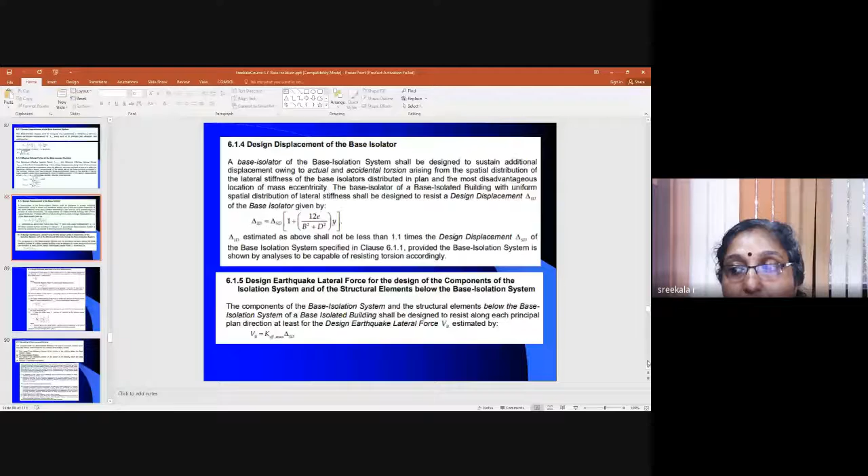Based on that, you can roughly calculate what should be the base shear which you need to consider. The minimum as well as the maximum should also be checked for adequacy of the link. So these are the procedures by which you can find out the minimum design lateral force and the maximum lateral force, considering all other worst case scenarios, including additional terms due to torsional effects.

So with that, the superstructure can be designed for a lesser force. But the substructure, the foundation, has to be designed as if the whole structure is modeled with a fixed base. And for that, whatever forces or moments come up from that analysis have to be used for the design of the foundation. So this is how it should be designed.

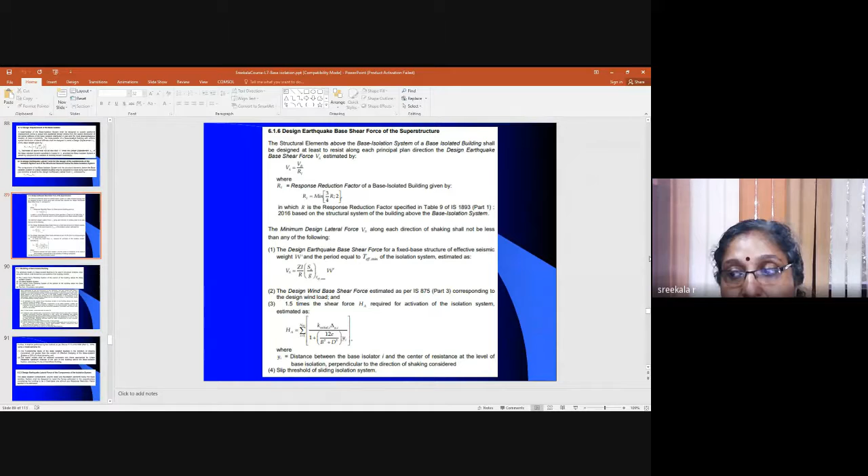Okay ma'am, thank you, thank you very much.

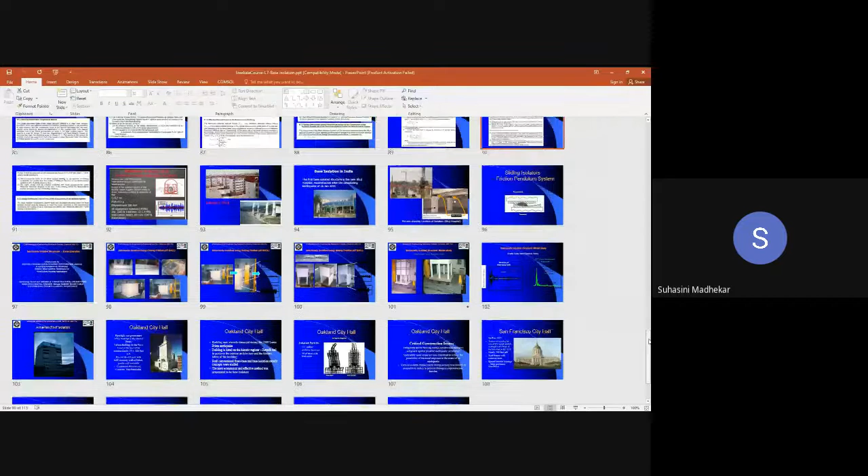Ma'am, there is another question in the chat box: is there any opportunity for students to conduct experiments at SERC?

Experiments at SERC right now, I'm not the authority to tell that. You can contact the concerned division, go through the website and contact the director and other senior colleagues concerned. You can see the experimental facilities which are there in SERC and inquire about that. For students, I think college students come here to do their project work, final semester project work and all. You can definitely inquire about that.

Thank you, ma'am. It was a very interesting session on seismic base isolation. You gave a very good introduction with several examples of seismically base isolated buildings in India and the world, and also an introduction to the forthcoming Part 6 of the IS codal provisions for base isolated buildings. I'm sure all participants have benefited tremendously from your presentation, and it will help all of us in our research. Thank you very much for your detailed assistance.

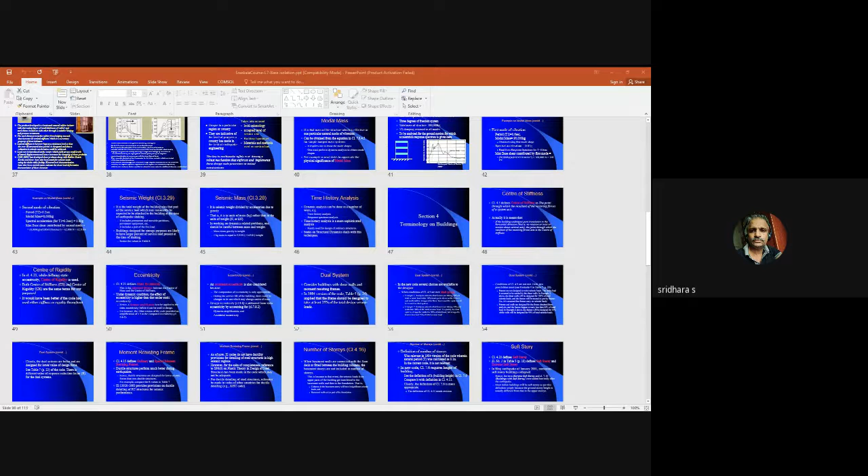So if there are no questions, thank you. I would like to wind up right now, and thank you so much for the opportunity given. Based on your questions and other inputs, I would like to improve my knowledge in this field. Thank you so much for the opportunity provided, and thanks to the organizers as well as your patient hearing. Thank you very much, ma'am, for your wonderful presentation and for sparing the time to deliver a lecture in our FDP.